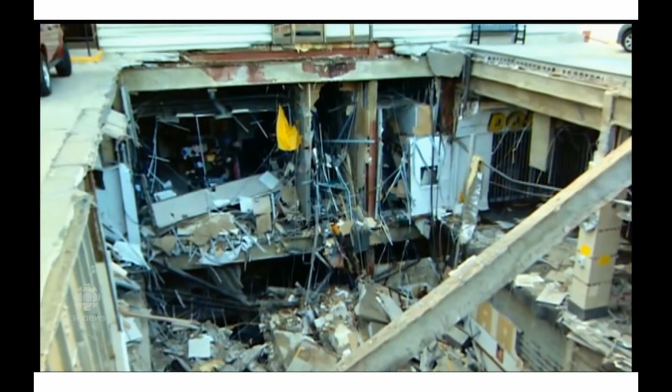There is so little by way of comfort and only some to be found here. A memorial for the victims of a senseless tragedy. One of them was their daughter. Rachel and Rejean Aylwin have yet to find peace. They've come here simply to find answers. Well, I feel it brings back a lot of memories. That's it. It was so sudden, the partial collapse of the city's mall roof two years ago, triggering an exhaustive public inquiry and now a scathing report.

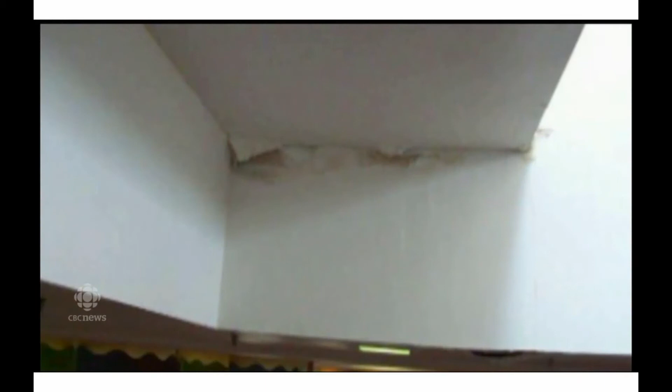A rusted steel beam was the obvious cause of the collapse, but the report found the most damning culprit was the staggering neglect behind it. They ranged from apathy to outright greed, obfuscation, and duplicity. The inquiry revealed shoddy construction meant the mall's roof began leaking as soon as it was built in 1979. That despite repeated complaints and obvious decay, inspectors, public officials and owners, including the most recent owner, Bob Nazarian, ignored calls for proper repairs and did little more than patchwork. No finger to be pointed, especially at the owner.

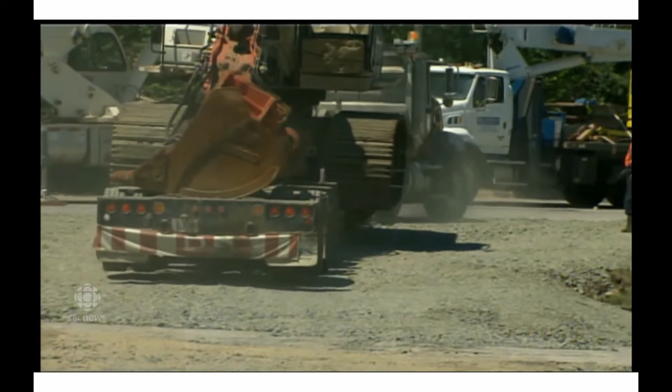The controversial rescue operation that was abruptly called off and then resumed was also examined. The report found 74-year-old Doloris Perizzolo died instantly, but that 37-year-old Lucie Aylwin may have survived for up to 39 hours. Miscommunication between emergency crews and delays in getting the right equipment may have hampered her rescue. It is probable, although by no means certain, that she lived and might have been found alive had the rescue effort been executed more rapidly and more effectively. To the Aylwins, it's one more horrible what if. I hope she didn't suffer for 39 hours. And it doesn't change anything.

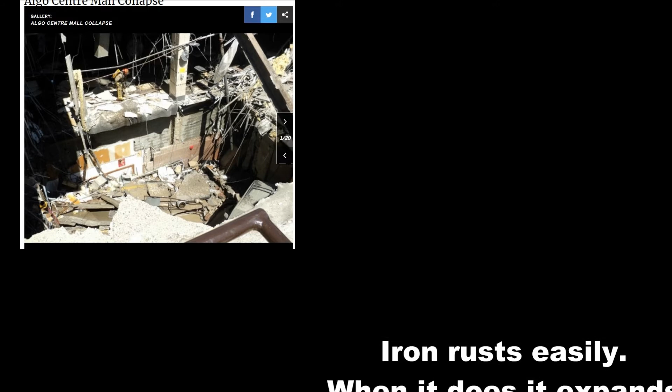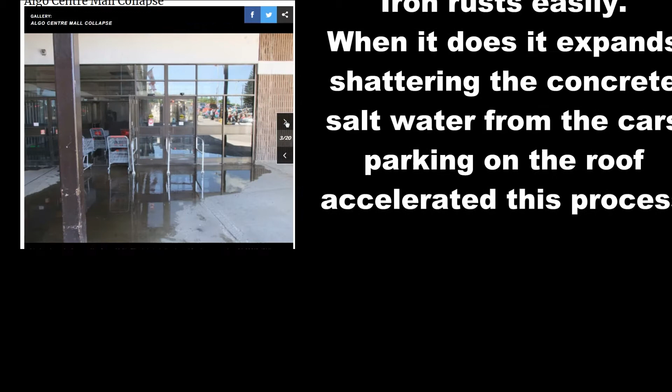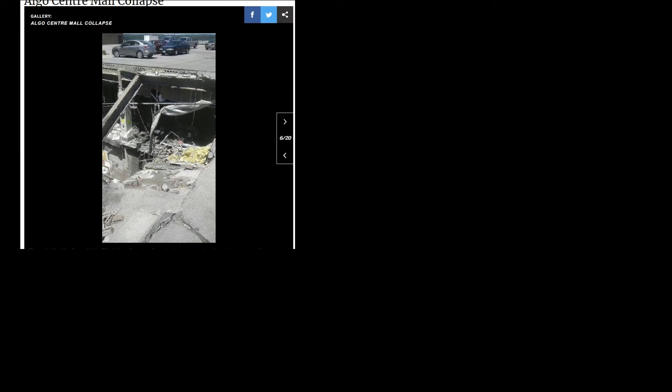The first cause of the collapse is the obvious rust in many of these cases. And it was a real tragedy, and you were only 8 years old, thereabouts, so it's already history to you, but it's quite recent to me. And the main culprit was deciding to save space by putting a parking lot on the roof, and this led to the corrosion of the building underneath. It was untried for a reason, and the engineer never should have agreed to this design.

It seems so detached from reality, much of what we do in the schoolroom, but the implications of some of our chemical experiments lead to knowledge that should have prevented this building from being built in the first place. And when science and business collide, business tends to have more money and gets its way. This is not the first time this kind of destruction has occurred due to the properties of iron that we don't like, that it rusts.

I'm going to take you on a small tour of the corrosion process that makes iron really rather unsuitable for many of the building processes we have been doing for thousands of years. But the problem has been there's little else we can do. And so this would be a billion-dollar solution, to find a way around using iron inside our buildings to reinforce them. If you don't use rebar, which is called reinforcing bar, inside the concrete, you might as well stack mud. It'll crumble to pieces. So you have to put a steel skeleton inside the concrete.

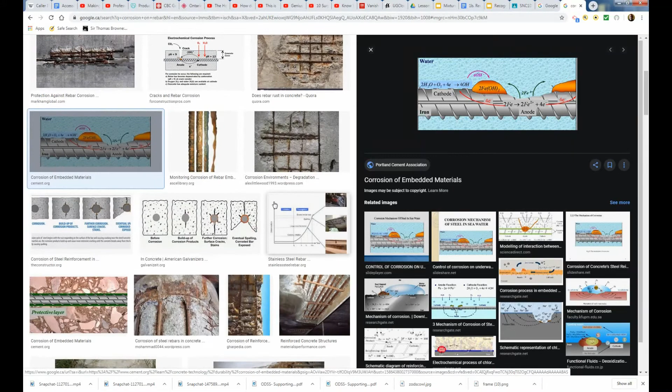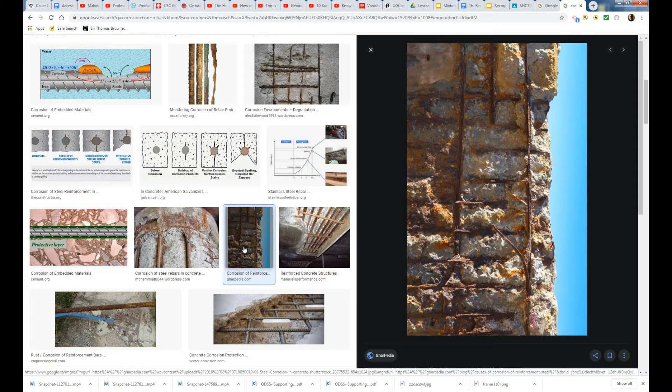This equation going on in here showing how the rebar is chemically attacked is something chemical engineers and building engineers would look at to try to solve. And they know the entire process; to eliminate it would save lives and make our buildings last a lot longer. So this would be about grade 12 chemistry if you got that far. But you can see evidence of iron's unsuitability. But the whole thing is, we don't have anything better to reinforce our buildings with. Sure, you could switch to stainless steel and titanium. That would be fantastic. But for a non-chemical reason, the cost makes it impossible to do.

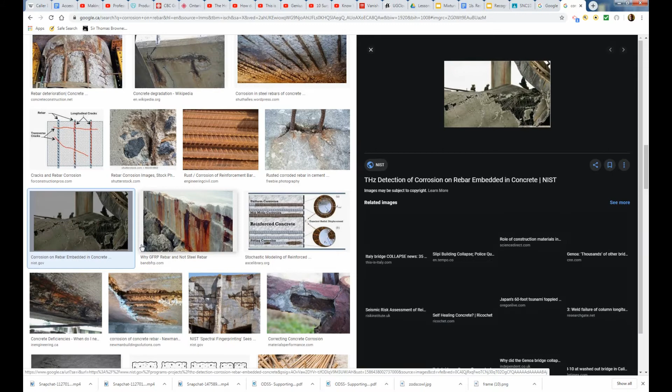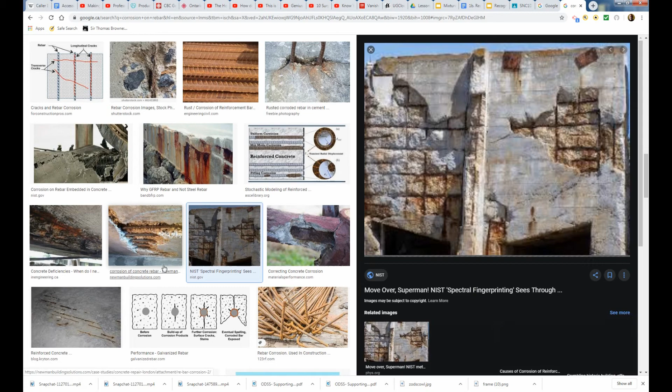So rebar corrosion may not sound very romantic, but people die if it fails in a big way. And you can find this everywhere on the planet. Malls collapsing, buildings collapsing, and there's more to a building's structure than just the rebar, but it is one of the well-known failures in our construction industry, and this is what limits the lifespan of bridges and buildings made with concrete and is a real problem in dams.

Now, this rebar here does not look like iron, does it? This one here says galvanized. And what galvanized means, you've probably heard of galvanized buckets, is you've coated it with zinc. And if you get a nail that's zinc coated, zinc has almost a chrome-like look to it, but it's dull.

So why haven't we moved to 100% galvanized rebar? Again, the cost, and you run into another problem. You see here, low-end construction, and the engineers decide this. They wire tie the rebar together. But if you've ever gone by a building that's being assembled, you will often see welders working on the rebar. So in other situations, they may weld the rebar together. And at that point, the zinc is not only useless, it's actually hazardous because you'll burn the zinc coating off when you weld. So the money you spent putting this coating on here will be gone.

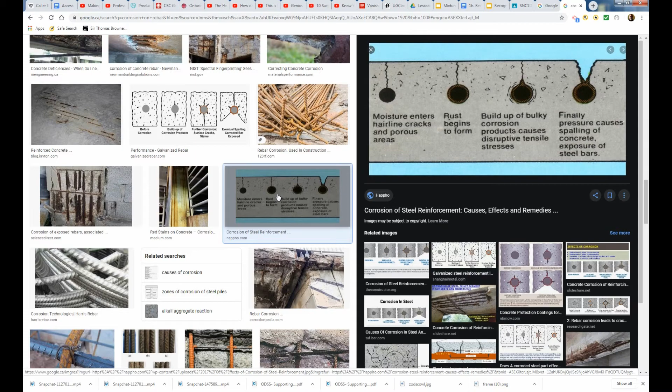I'm going to introduce you to something else here. And you might go, why didn't I just put this as reading? Because sometimes this is nicer. It would be something closer to what I did in the classroom. If we look up galvanic corrosion, I'm sure you've seen this. And I would like you to read this Wikipedia page. Doesn't mean memorize it, doesn't mean you're going to be studying it, but this is the closest I can bring this stuff real without our classroom. In the classroom, I could show you this stuff. I could pass around things that you could handle. So this is my attempt of replacing the show and tell in the labs, is to kind of tour you through things.

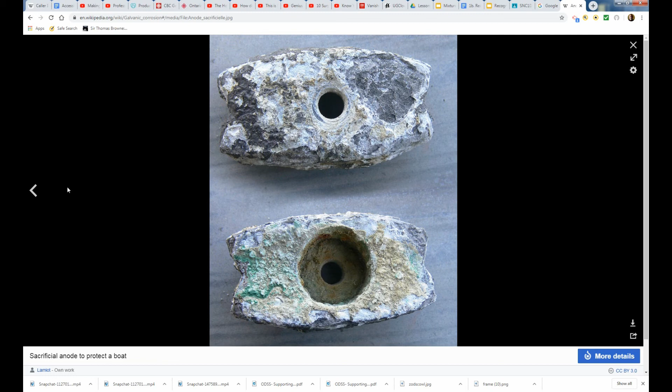And not to be paranoid, but when my girls were babies and we drove them out to British Columbia, at every hotel that had a wave pool, a slide or something, the first thing I would do is look at the bolts on the base. It's not to be neurotic. It's to be abundance of caution. And the old mall in Orangeville, the original light posts were sticking up on concrete pillars, and the bolts were very rusted. And I tended to avoid parking near those light standards because I figured they'd fall down one day. Well, then a few years ago, they completely replaced those light posts.

If you pay attention, you will probably hear in the media of a building, a slide, a water park, something collapse over the summer, and it's a failure to inspect these bolts. When I've gone to Canada's Wonderland a few times, same thing. I tend to look at the bolts at the base of the towers to go, is anyone inspecting these things and making sure they work? Now, what's really cool here is this. Here's a little bit of trivia for your parents: read this section on lasagna cell. And you may have seen it in your fridge, you just made no note of it. So anyway, this is an example where we can have a property that we don't desire. Now this is a chemical property of iron I've been covering, and I'm doing it in physical properties because the two kind of merge over a little bit.